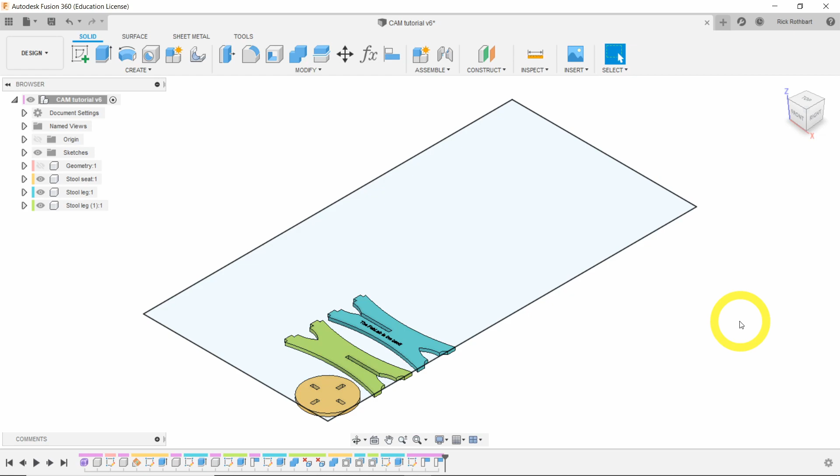All right, let's switch from the design workspace to the manufacture workspace. Move your mouse to the top left of your screen and click where it says Design. Now move down and select Manufacture. If you have an older version of Fusion 360, then it might read CAM instead. Don't worry, Manufacture and CAM are the same thing.

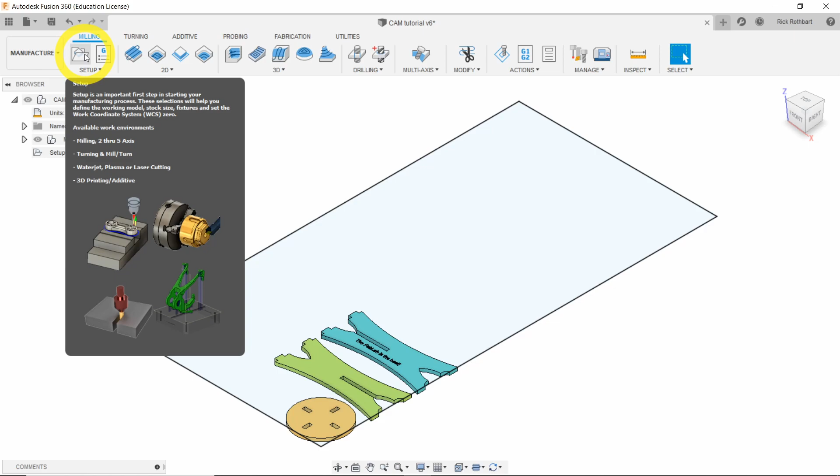Now that we're in the Manufacture workspace, we're going to start up here in the top left by clicking the Setup button. This is always your first step when designing your toolpaths. Let's take a look at the setup screen here. We have a short list of properties to change. The first thing we want to ensure is that the operation type is set to milling when using a CNC router or ShopBot.

The next thing we want to do is ensure that our work coordinate system is set up in the proper orientation as it relates to our CNC router. I want to take a moment to explain the work coordinate system and why it's important to set it up correctly.

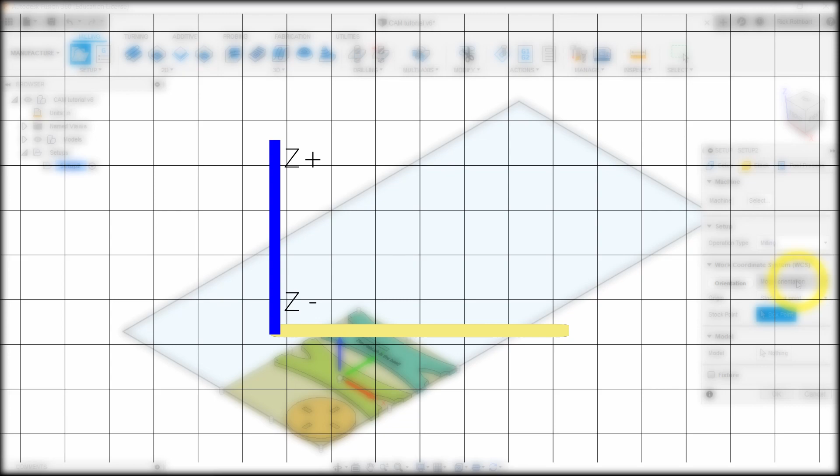Imagine a CNC router as if it were laid out on graph paper. In one direction we have an x-axis, and in the perpendicular direction we have the y-axis. Taken together, we have the x and y plane. The bed of our ShopBot, or any CNC router, exists within this plane. Perpendicular from the x and y plane is the direction of the sky. This is the z-axis. We need to ensure that the x, y, and z positive directions within Fusion 360 match the actual positive directions of our CNC machine.

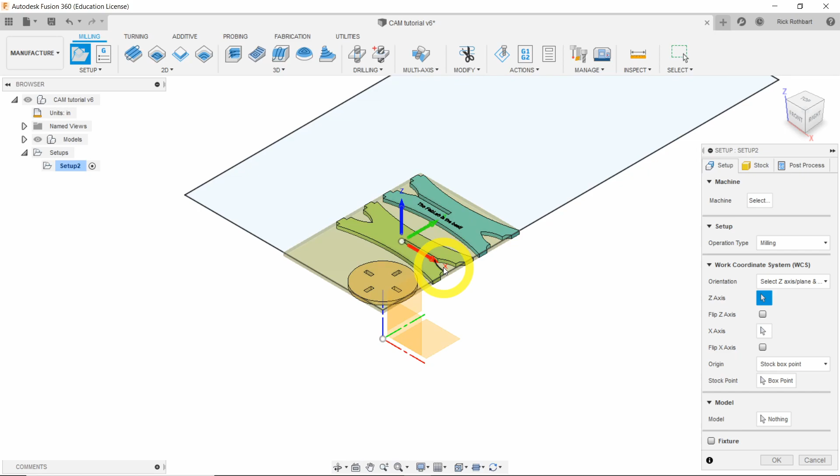So let's go ahead and do that by changing the orientation from model orientation to select z-axis/plane and x-axis. The first thing we want to do is select an edge of our model that corresponds to the z-axis of our CNC router. It could be any one of these features you see here.

Then we'll have to find our x-axis. In this case, I'll click the long side of the plywood sketch we drew in the previous video. We're going to need to make sure that the arrowhead on the red axis line is pointing to the right so that it will encompass our entire project. To do that, click Flip X-axis.

Now we need to set up our X, Y, and Z origin, or starting point. To do that, change Origin to Stock Box Point. Then we need to choose the bottom point such that the entire project is encompassed by X, Y, and Z positive. The arrowheads in Fusion denote positive direction. We want to ensure that Fusion knows which models to include in our setup. Click Model and choose the bodies you are intending to cut in this project.

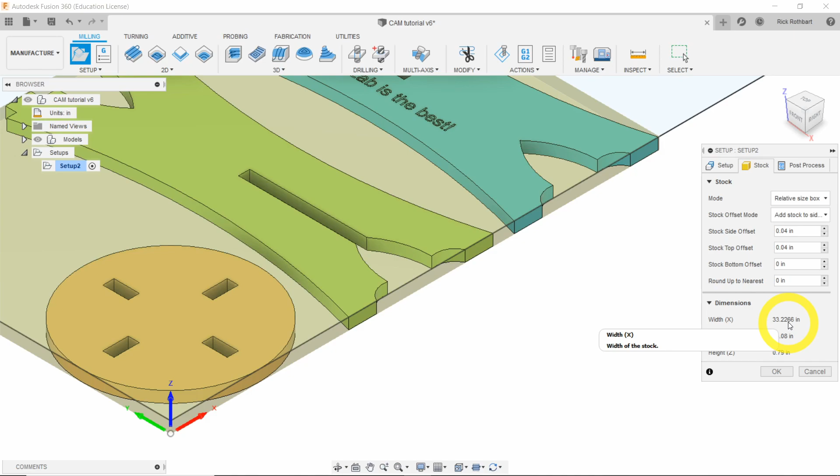So now we need to set up our stock. Click on the Stock tab and change the mode from Fixed Size Box to Relative Size Box. When we look at the Dimensions section, we should see how big a piece of stock material we'll need to cut our project. Let's delete the default stock side and stock top offsets.

When we check our dimensions again, the Z height field should read the exact thickness of plywood that we measured with our calipers. If it doesn't, you'll need to go back to the design workspace and update your parameters or extrude features so that the thickness of your bodies equals the thickness of the plywood. It's also possible that your bodies aren't in the same plane, so you may need to realign them as well.

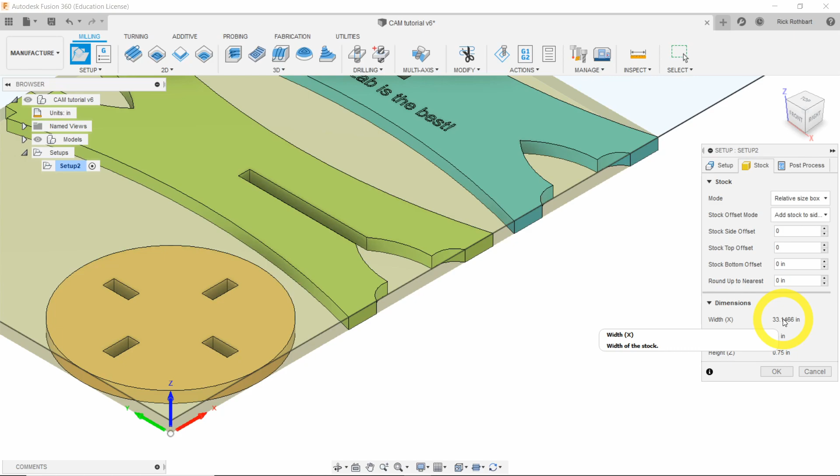Okay, so now that we're done, let's click OK, and now give the setup a meaningful name by double-clicking on the setup icon in the browser and renaming it.

All right, good job creating your first CAM setup in Fusion 360. In the next video, we'll learn how to design two-dimensional toolpaths, the first of which will be 2D contour cutting.